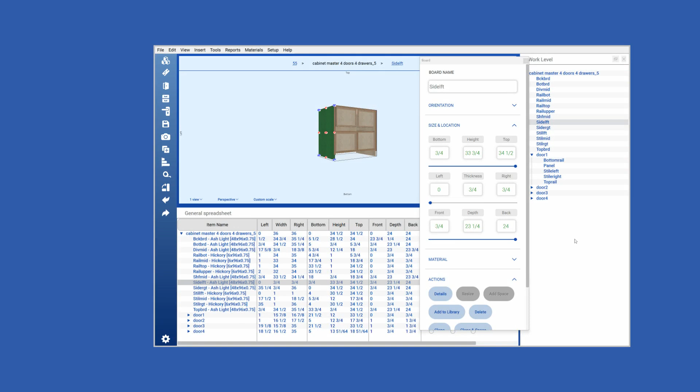Parametric design in woodworking. Designers do not draw lines or boxes with the parametric approach. They type in sizes and locations. Parametric software controls the design details by applying rules and software calculations to create and modify the design. This lets designers quickly test different design choices or adjust as needed. By tweaking parameters, woodworkers can make designs that address specific needs.

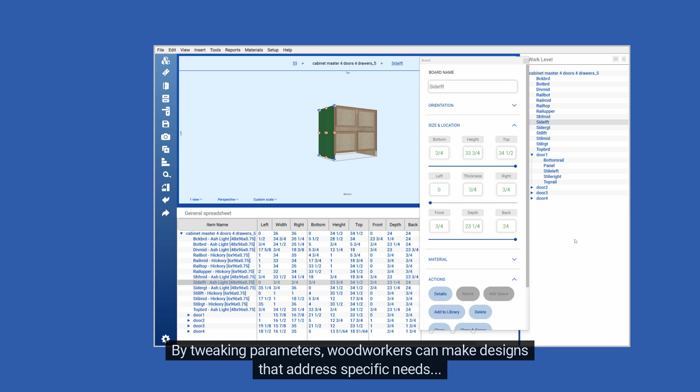There is no reason to redo designs from scratch when that work is already done. Just look in the library, select an existing piece, and modify it if necessary. If modifying an existing library member isn't enough, you can use the Cabinet Wizard. In Cabinet Wizard, you select a model type, then change any number of variables to make that design meet your needs.

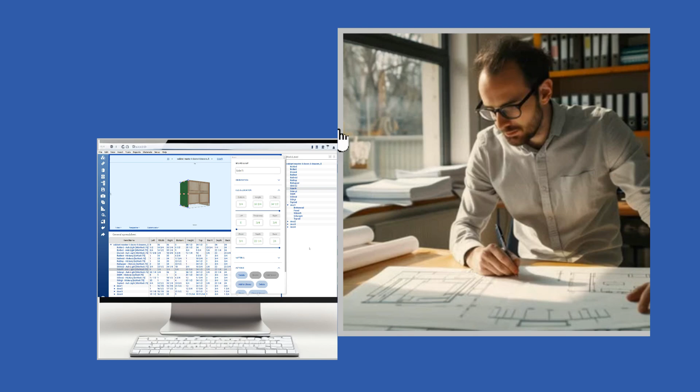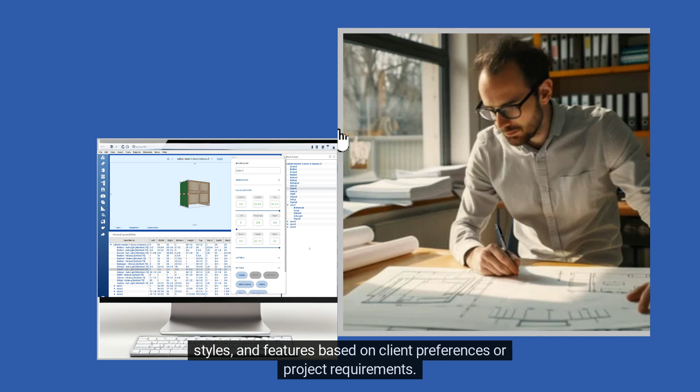SketchList 3D designs are parameter-driven. Parametric design involves using software that uses rules and calculations to create and manipulate design. It allows designers to create models that can be easily modified by changing specific parameters. This approach can be particularly applicable to cabinet making, enabling woodworkers to quickly adjust dimensions, styles, and features based on client preferences or project requirements.

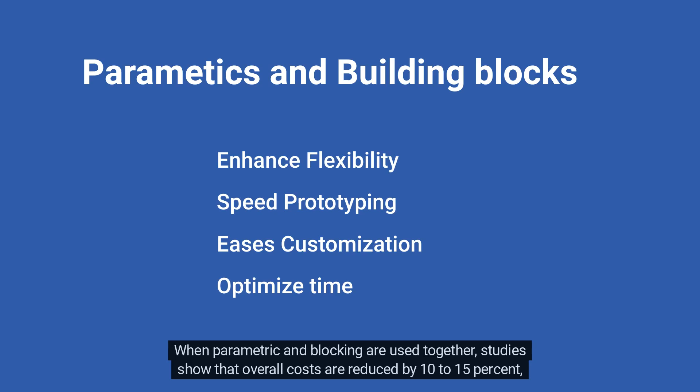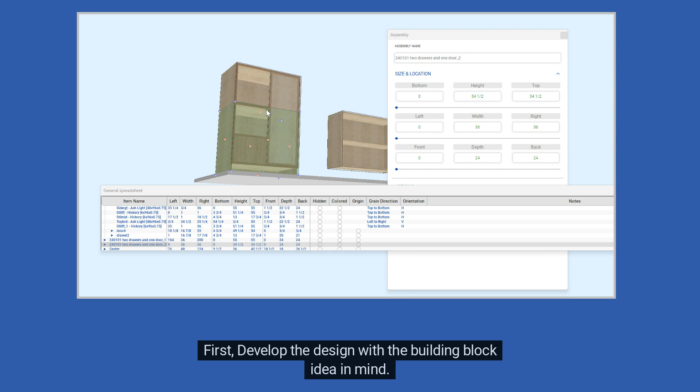When parametric and blocking are used together, studies show that overall costs are reduced by 10 to 15%, construction time is reduced by 20%, and considerable energy savings are achieved. Here's how you can blend these two methodologies. 1. Create blocks. First, develop the design with the building block idea in mind. Better yet, reuse existing design segments. These serve as the fundamental components of your design, enabling you to create a variety of configurations quickly.

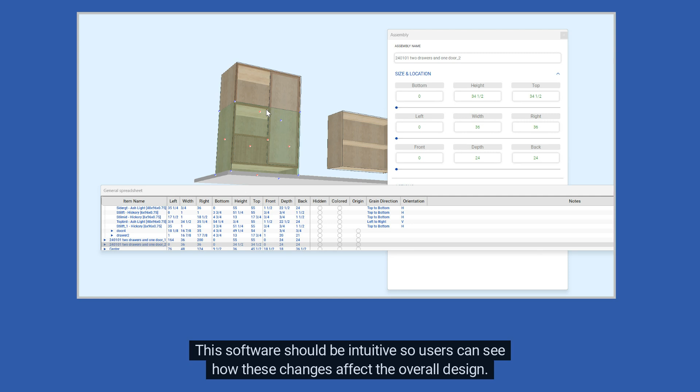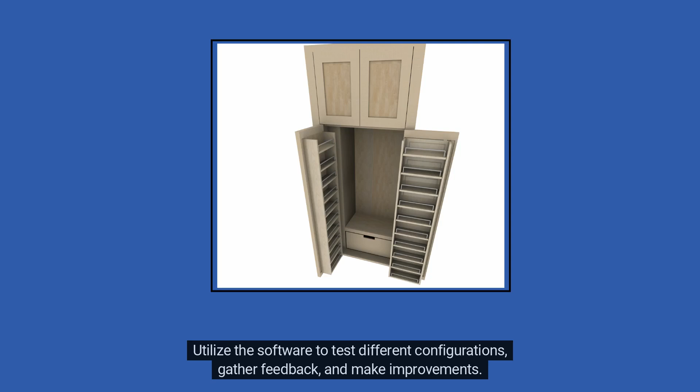2. Use the right software tools. Good design software has a user-friendly, data input-driven interface, allowing designers to manipulate building blocks dynamically. This software should be intuitive so users can see how these changes affect the overall design. 3. Test and iterate. Utilize the software to test different configurations, gather feedback, and make improvements. This step lets you refine your design to meet all requirements. You can identify potential issues early in the process by trying various configurations, allowing for quick adjustments.

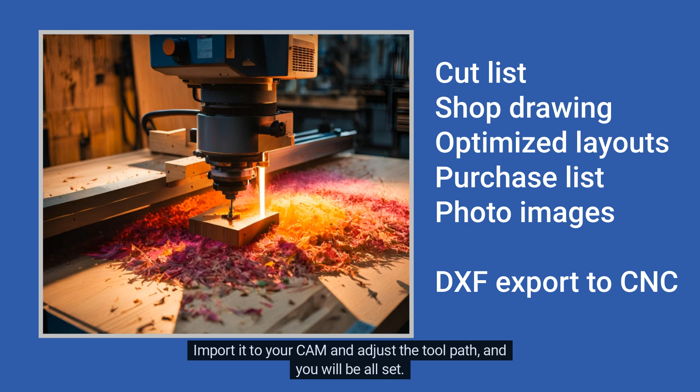Finalizing the design involves printing reports such as the cut list, shop drawing, and optimized material layouts. Run off a material purchase list. Indeed, a high-resolution 3D should be provided to your prospects. And if your shop runs CNC equipment, you want to export the DXF file. Import it to your CAM and adjust the toolpath, and you will be all set.